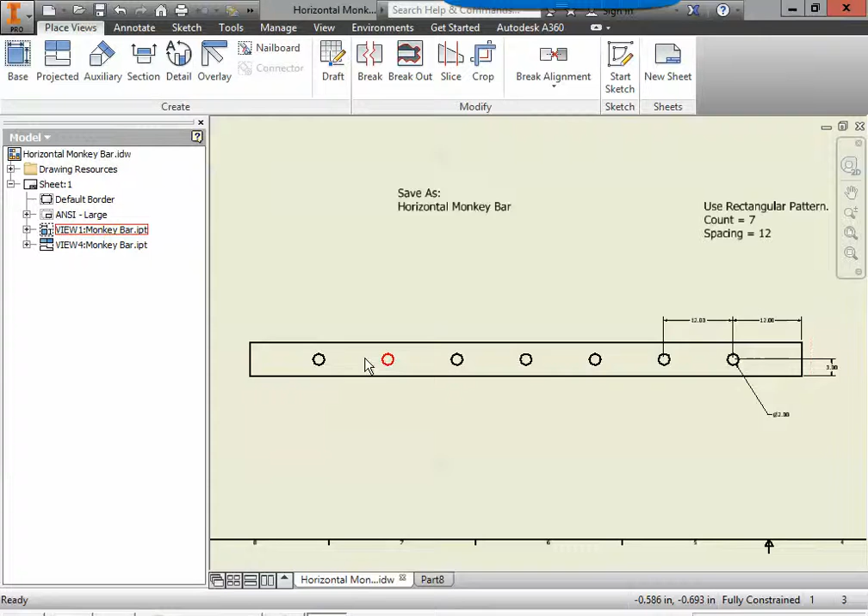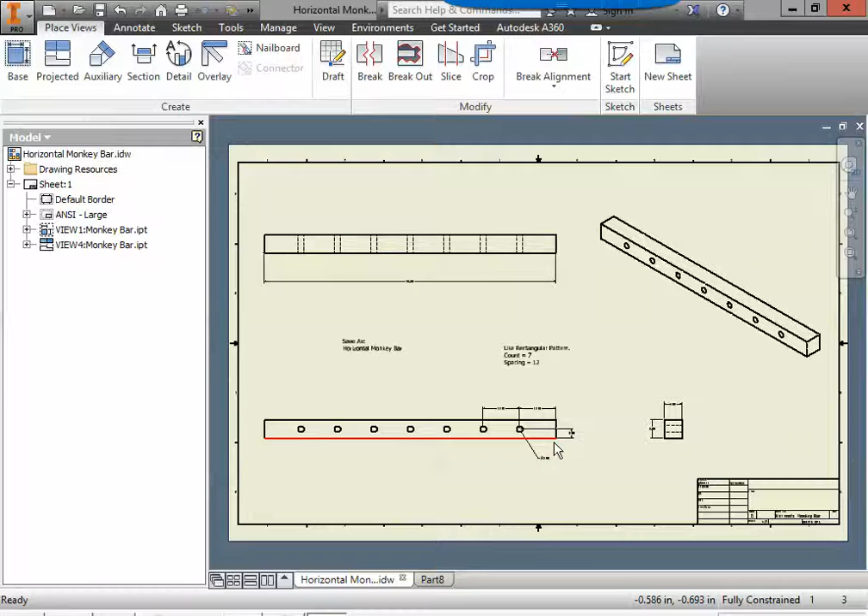We're going to draw this big rectangle that you see on the front here. That rectangle is 96 inches long and it's 6 inches tall. In fact, the end is 6 by 6. That'll come in handy because later when we extrude it, we're going to extrude it 6 inches. But for now, let's make a rectangle that's 96 inches long and 6 inches tall.

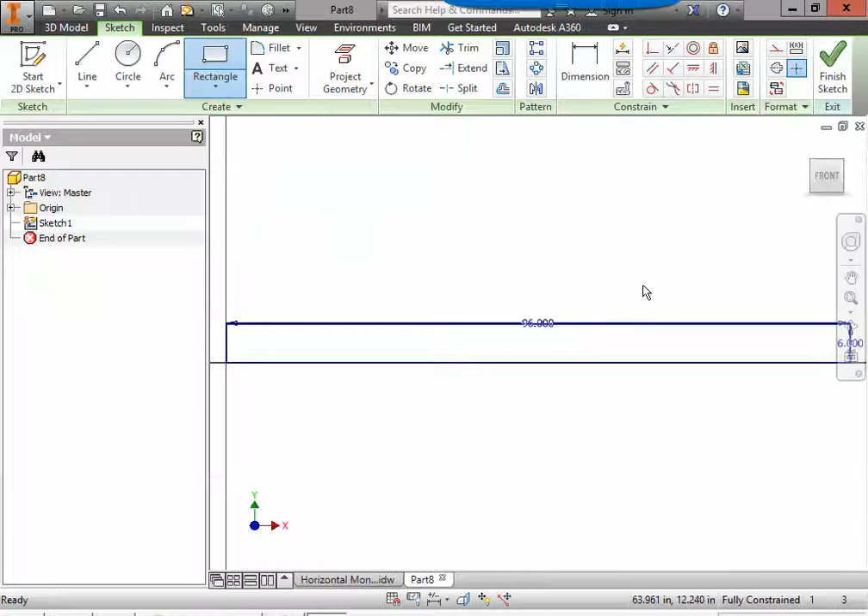So we can grab a rectangle tool, start at the origin, we will make it 96, hit the tab key to go over to the height, and tell the height to be 6 inches. And then I can hit enter. Looks good to me. Let's finish our sketch. I like to go to the home view to see it as I'm extruding, and we're going to extrude that rectangle, that's right, 6 inches.

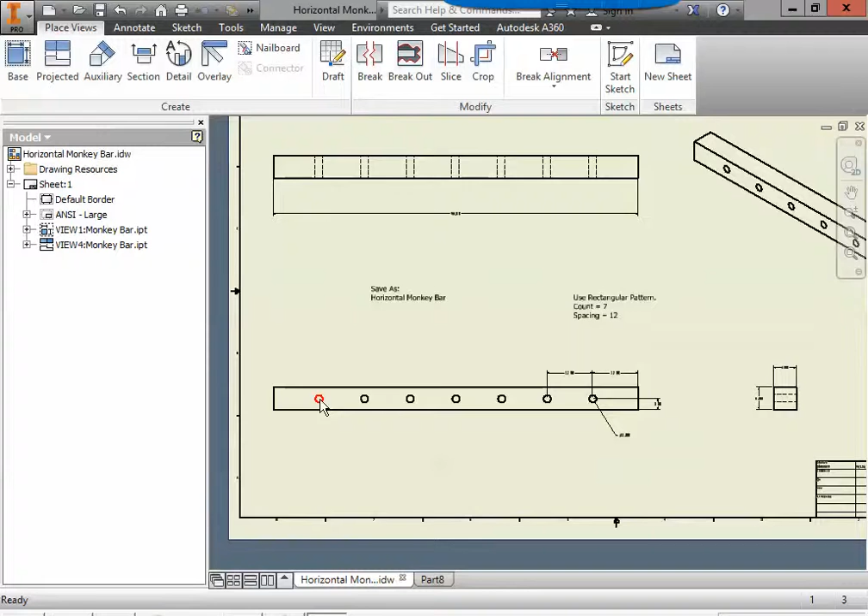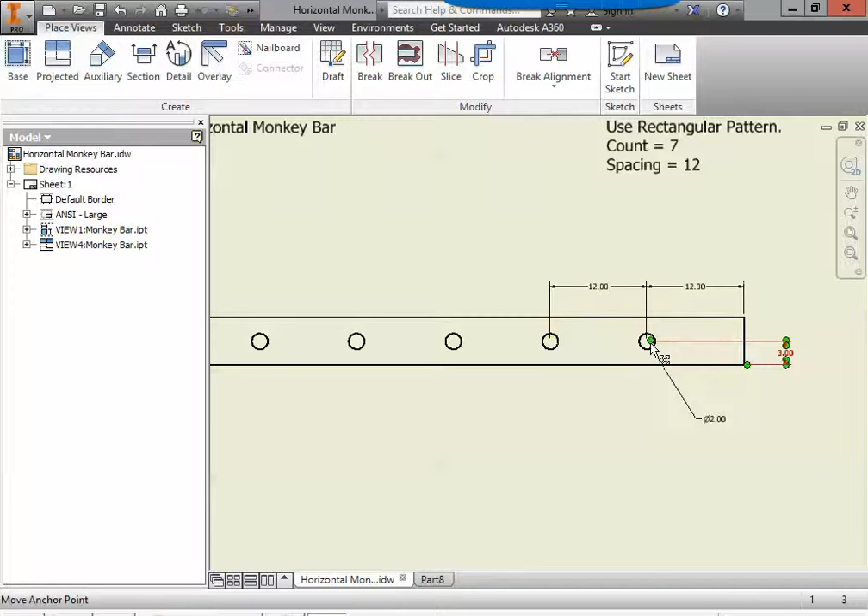Now we have to move on to the holes. The holes can be done a number of ways. For us, we're going to use the rectangular pattern in the sketch. And we're also going to use the hole tool. So back to our part. We're going to be creating a point on here. We're actually only going to draw one point. And that point is going to be 3 inches from the bottom to the center point. And it's going to be 12 inches from the end.

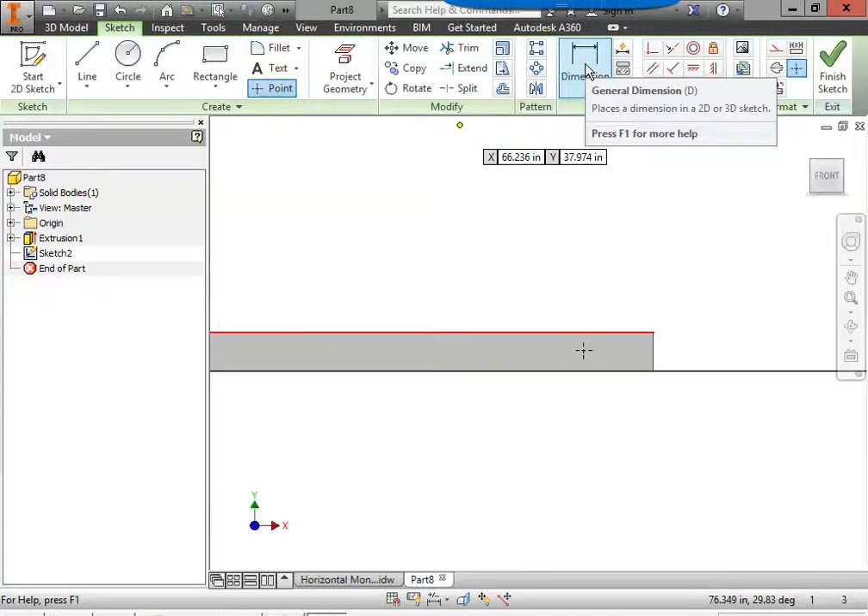So we'll say start 2D sketch on the front. We'll grab the point tool up here and place the point tool somewhere on our part. Next, we're going to dimension that point. It needs to be 3 inches from the bottom to the center of that point. Oh, I selected it right, but it didn't work, so I'll hit escape. Let's try that again. Dimension from the bottom to the center. There we go. And I'll click to place it. That's going to be 3 inches, and I'll hit enter.

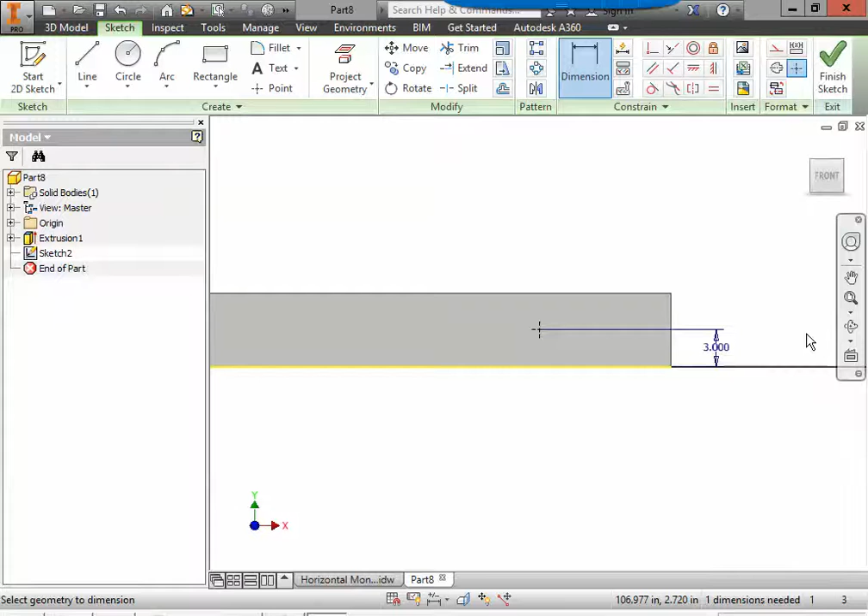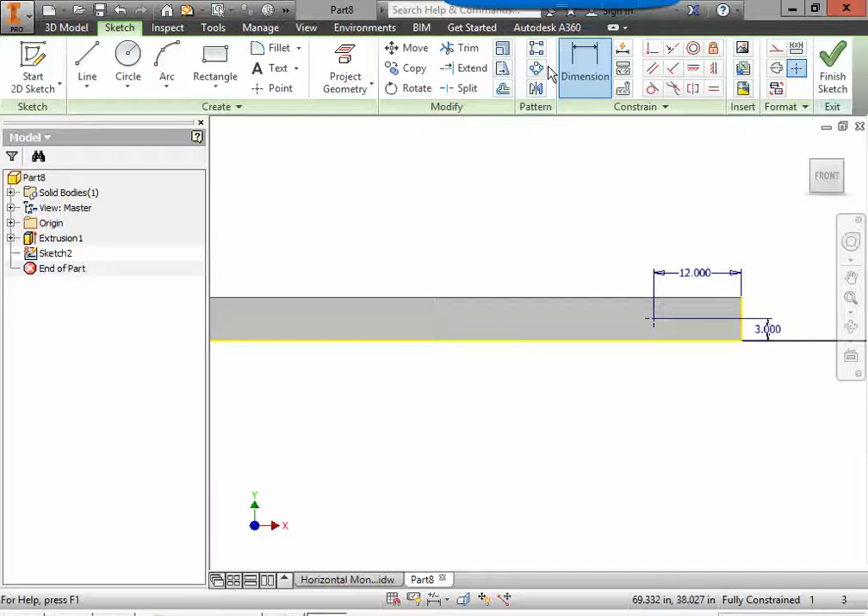Then we're going to dimension from the right side to the center point. When I click to place that, that's going to need to be 12 inches. Awesome. That is the only point we actually have to draw. Now we're going to use a rectangular pattern. A rectangular pattern is found up here. We have rectangular, circular pattern, and mirror. We're going to use the rectangular pattern. And the first thing we're going to need to select is the geometry. What do we want to actually pattern? We want to pattern this point right here. So I'm going to wait till it's red and then click on it.

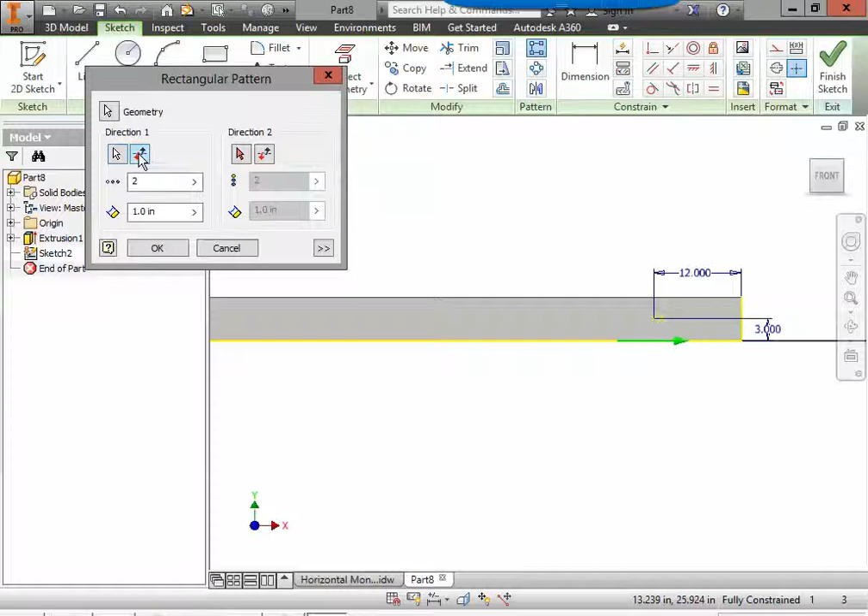Next, we have to tell it what direction should it pattern this. Should it go left to right, top to bottom? So we're going to click on the direction 1 arrow, and, well, looks like I can't select the top line. We're going to select this bottom line, and it's going to let us go from left to right. And you notice the green arrow is pointing to the right. We actually want to pattern off to the left. Not a problem. We have the flip-flop here, and we can change which way it's going to pattern.

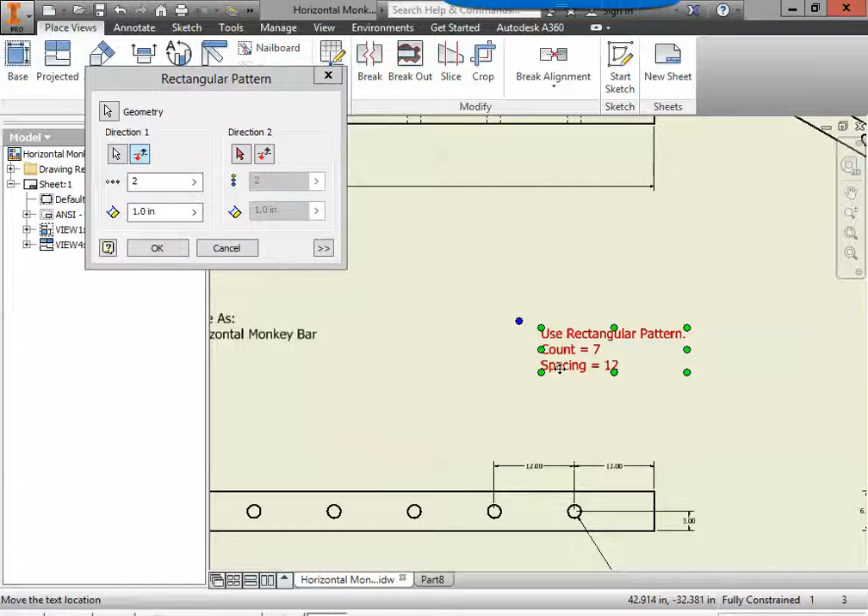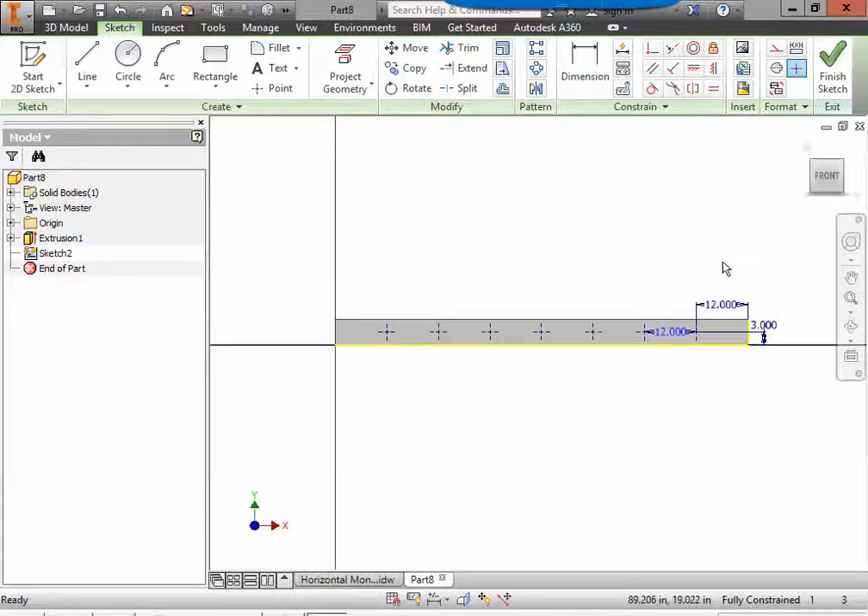If we come back to our sheet, I've put a nice little rectangular pattern box for you. In there, it tells you that you're going to need a count of 7 because we're going to have 1, 2, 3, 4, 5, 6, 7 holes, and they're going to be spaced out 12 inches apart. So we're going to change the count to 7 and the spacing to 12. Then I'm going to double check. Looks pretty good. 7 of them going to the side, spaced out. I can hit OK. I like it. We are done with this sketch now. We can say finish sketch.

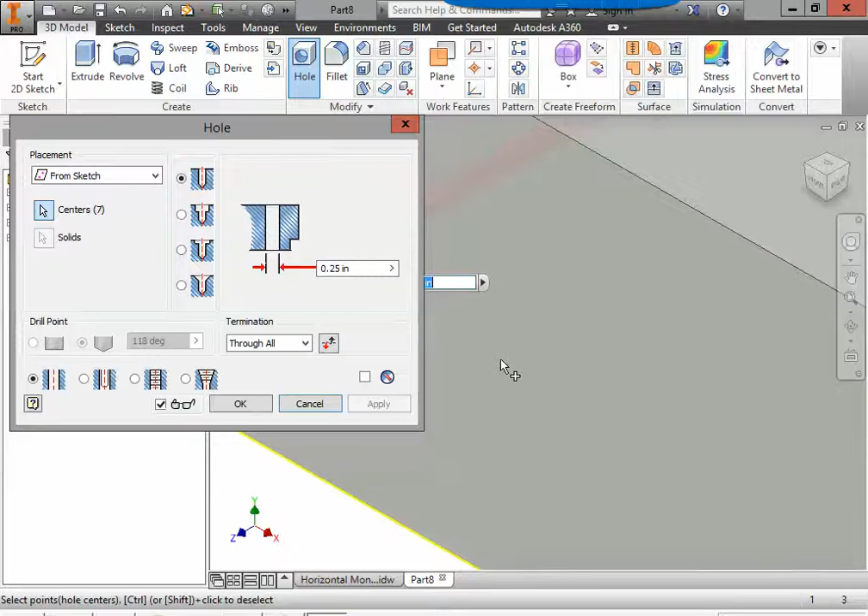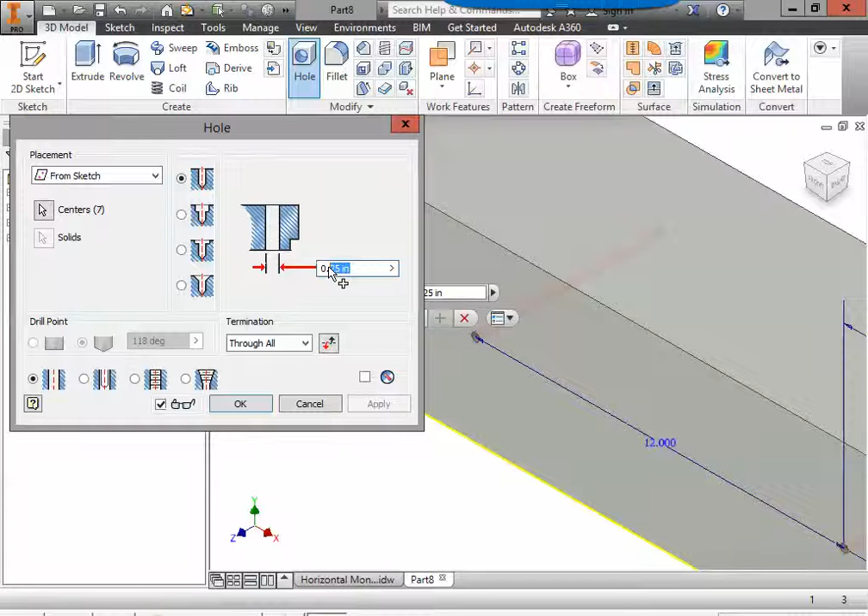We're going to grab the hole tool right here. The nice part about the hole tool is it automatically selects every single one of those points. Right now they have a diameter of 0.25 inches and they're cutting through all of the piece. Well, we do want to cut through all the piece. That's true. But our diameter needs to be 2 inches. So we're going to highlight that diameter and change that to 2 inches. And it's going to cut through all. And we can say OK. There we go. We have our 7 holes equally spaced, cut all the way through.

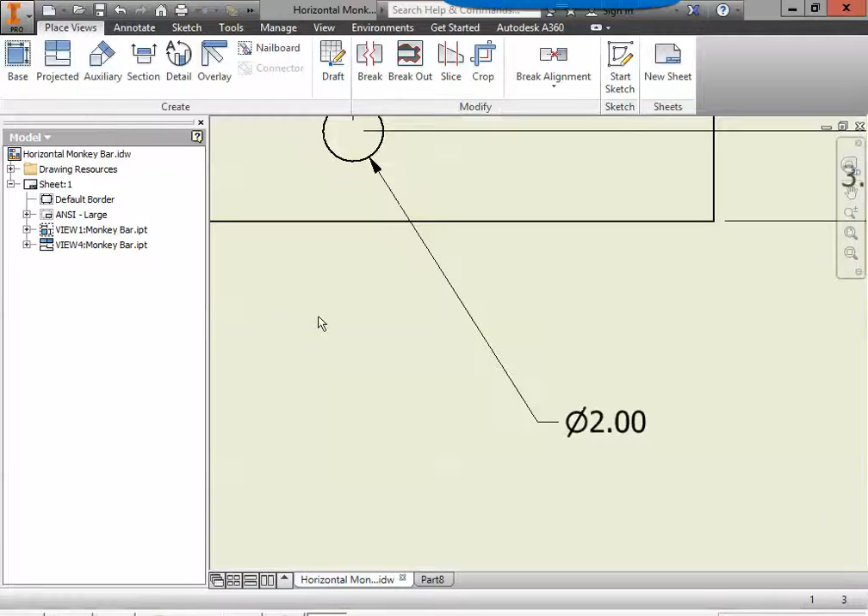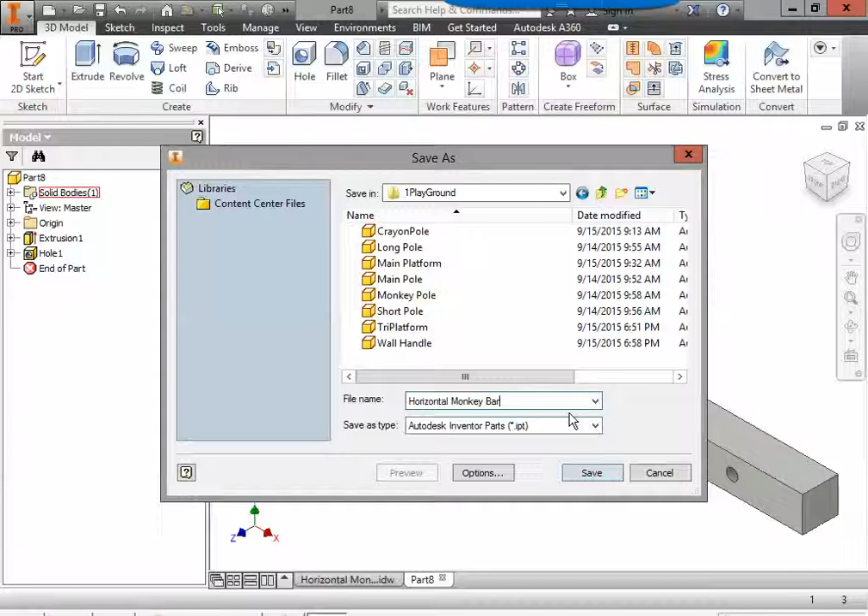Now we can save this. And the name on the sheet says horizontal monkey bar. So let's go to the Inventor I. Save as. Select your H drive. Select the folder if you created one, or just put it in your H drive. And you have to give it a name. So the name is going to be horizontal monkey bar. It's in the right location. It's got the right name. We'll hit save. There you go.